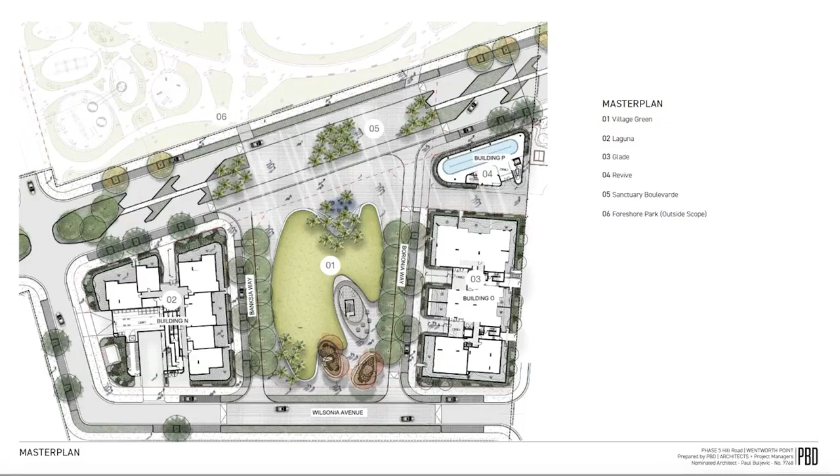Ed touched on Sekisui's core principles, and what we've done in terms of our architectural approach in the conceptual arrangement is incorporate these core principles within a theme inspired by nature, utilising components of nature's organic fluid form and texture within our built form design.

When we're looking at architectural design and putting a built form together, there are really three steps we take. It looks at a primary form, then starts to look at the articulation and the horizontal and vertical treatment of a built form, which brings that articulation together. Then we move into a third tier, which is typically looking at the finer grain detailing.

Looking at those pragmatic ways we've adopted that inspiration, we're taking a master plan envelope and articulating it in a form that expresses that fluidity, that sculptural element.

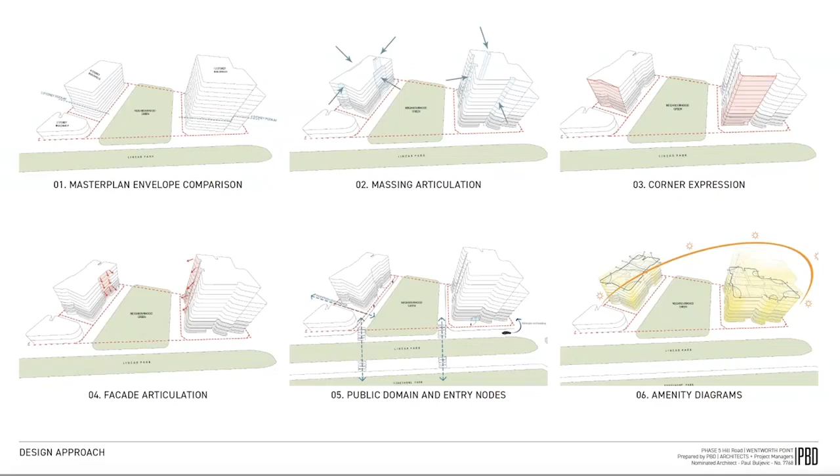They're quite intentful in terms of an indentation here might promote a view or additional aspect towards the north, or natural cross-flow amenity. Those are some of the steps we've taken to derive the built form, and I think they're quite important diagrams to at least understand the basis for how we've approached the architectural built form. You'll see that in these perspectives.

When you're looking at those earlier considerations in terms of built form, you can see how we're applying that fluidity to create that corner expression of Laguna, for instance. We've got a thicker ribboning detail along those podium levels to, again, promote more privacy in a pragmatic way, but also help the form give a sense of grounding and a lightened sense of detail as you approach the upper levels.

And then we talked earlier about how we use that finer grain texture inspired by nature to introduce some of these finer screened elements, the softer touches which provide texture along the facade, but also help identify principal nodes of entry. They identify the corner of the built form and move that expression amongst those three buildings as a cluster of buildings that relate to one another in that sculptural form.

They have their own identity, but they carry through some of the palette, some of the design intent, that fluidity, that organic form. You'll see Laguna is a 13-story building to the top left, and Glade being the 8-story building on the top right.

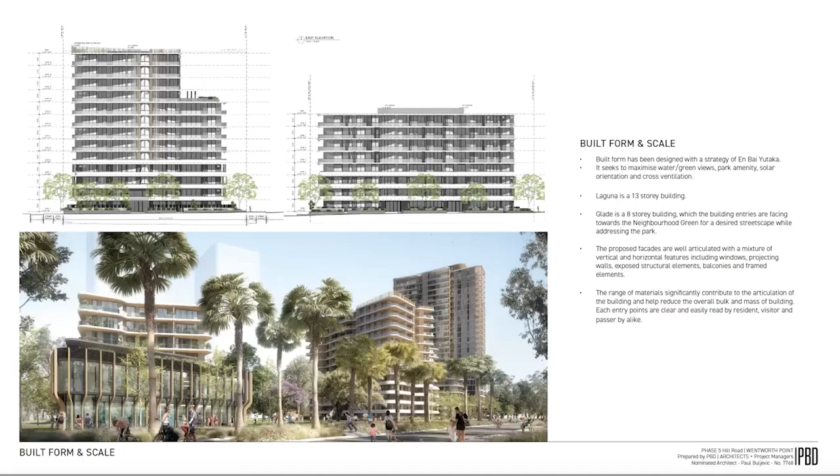So we'll just touch on the village green. It's quite a flexible space, quite passive. It has a perimeter planting type structure to assist in making it a more pacified space. It has a higher ground condition, which helps promote outlook over Sanctuary Boulevard through to the foreshore. As mentioned before, it's informally dedicated towards phase 5, but it is publicly accessible to all residents.

You'll see some annotations there in terms of some of the features accommodated within the village green, including an amphitheatre, water features, some barbecue areas, and again a tree-lined edge, which helps create that framing towards the park, and a good flexible open lawn space, which can be shared and accommodated and used by residents.

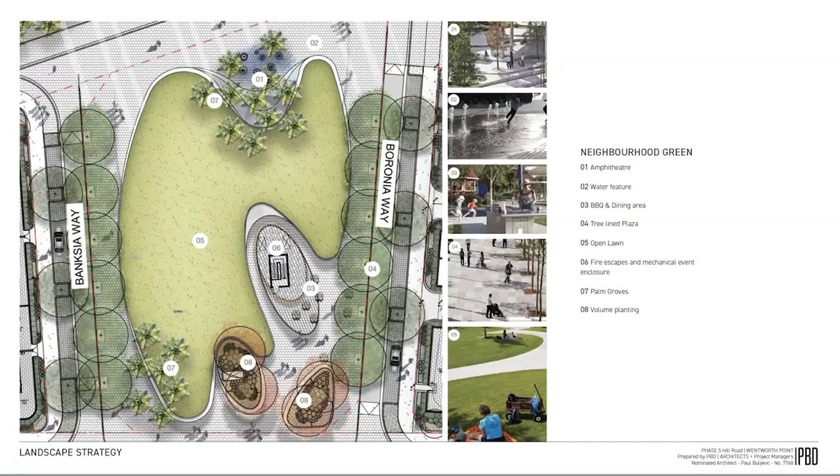And we'll let our landscape architect, Nick, sort of move into more detail of what's been provided in terms of facilities along that village green.

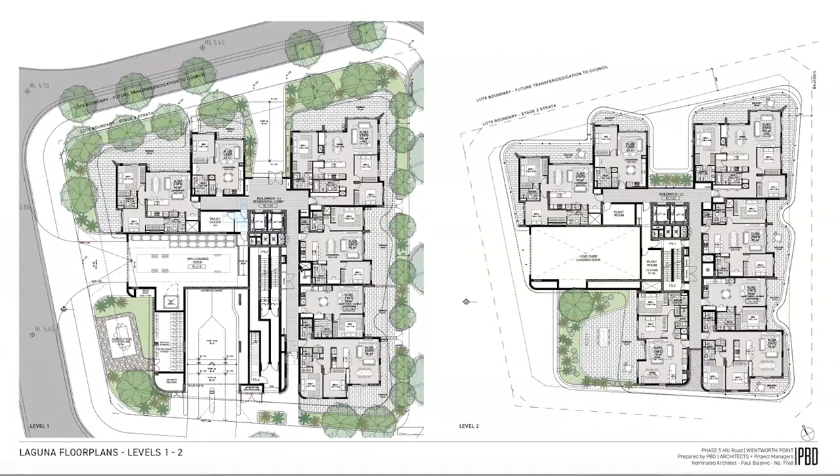I'll probably focus on a typical plan, but just to give you an idea about that ground plane level, so courtyard apartments again flanking the north and the village green towards the east, and keeping the servicing component through towards the south in terms of access to the basement, loading and bicycle parking you'll see along that edge.

But sort of zooming in on a typical plate, you'll notice that this building, or both buildings in fact, this entire phase has no single orientated southern facing apartment. So again, strike on that principle of amenity is maximising the apartments that have outlook towards the river, towards the foreshore park, towards the village green. We're really maximising the number of apartments that have that northern orientation. If they don't have a northern orientation, it's northeast or northwest orientated. And again, this building being 13 stories, having a scissor stair arrangement, a dual lift arrangement, access to natural light and ventilation to the lobby, and then honing in on the apartments themselves.

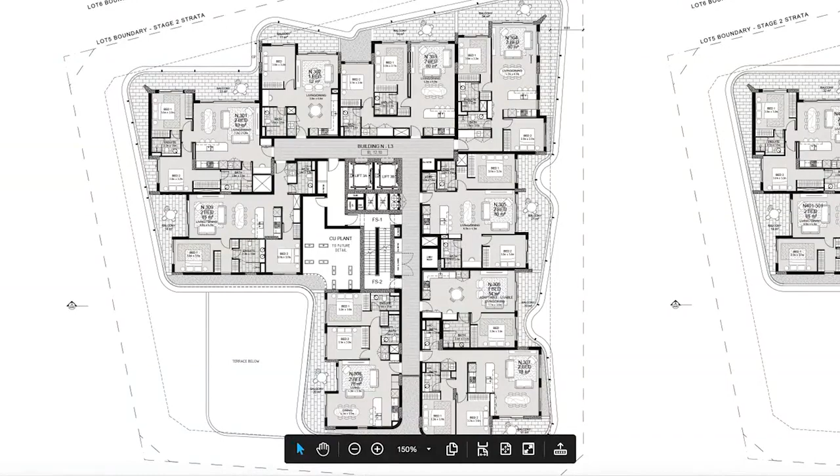Again, balancing the pragmatic with the beautiful, essentially looking at the spatial quality in terms of the interior layouts that maximise the opportunity for furnishability, uninterrupted wall space within the living area such that one can furnish, add artwork, entertainment units, it can be adequately furnished without interrupting the flow of that space, and using size and proportion to maximise furnishability and flow within that apartment. So you get an idea through here.

Again, plenty of storage. The master bedroom will always be of a size and proportion that's larger than the second. It has additional robe, ensuite. This is our kitchen with an island bench. All our 2 and 3 bedroom apartments have an island bench. Again, plenty of storage. Second bathroom, readily accessible from the second bedroom and for guests. And again, storage and a laundry cupboard. That theme in terms of size and proportion is carried through in all apartments.

So again, you'll see a living room here of an equal size and proportion at a minimum of 4 by 6 metre clearance. Kitchen with an island. Some consistencies along the way in terms of wet area detailing and kitchen detailing, which Angus will run through in greater detail. But that consistency allows for repetition, but it also allows for structural alignments, minimising transfers, ensuring ceiling heights are maximised throughout each apartment, and that connection through to the private open space is also maximised.

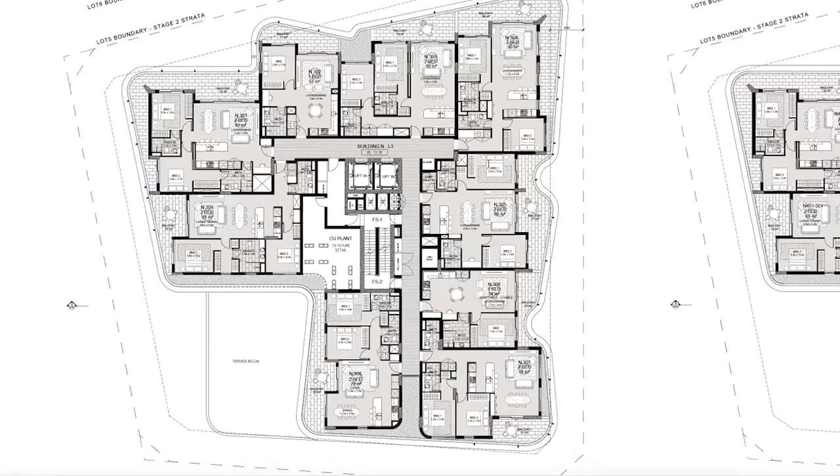This is quite a popular layout where we have bedrooms split on either side, an additional study, bedroom and bathroom doors off that nook, and a walk-in laundry in this instance, always accommodating a size and proportion adequate for that apartment.

Largely typical floor plates, though we do accommodate some larger apartments where we end the podium and express that verticality you saw in the CGI components. Again, wide fronting living room, dual aspect.

The proportions generally increase for a 3-bedroom, so 2 full bathrooms, master with additional robe through here. These apartments are carried through on those floor plates.

Where we have the opportunity, we have not only dual orientated apartments, but dual orientated living spaces, giving those corner living arrangements quite good amenity, outlook and natural light. So aside from not being directly north facing, these apartments will have an abundance of light and ventilation with that dual orientation.

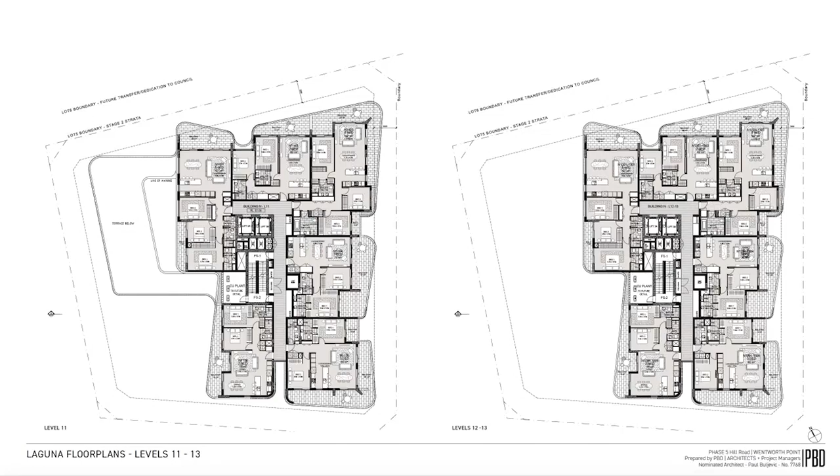As we move up, we have typical apartments in terms of 3 bedrooms, all typical from what's happening below. We start to look at amalgamation on those top 2 levels, where we have a 3-bedroom in both the northeast and northwest orientation, with corner living rooms and that dual orientation.

I'll keep moving through, we'll have some questions at the end. This is essentially looking at Glade, an 8-story building. Given it's 8 stories, there's no requirement for a scissor stair or an additional fire stair.

So we've split the building into two cores, which maximises the amenity and the opportunity for dual aspect apartments. This building far exceeds apartment design standards in terms of access to both solar and naturally ventilated apartments, with all these dual aspect, wide fronting living rooms creating really good amenity.

These are northeast, northwest facing apartments, with that bank of 3 facing north maximising the opportunity to achieve good amenity. All the same principles as you saw in Laguna have been adopted in Glade in terms of room sizes, proportion and clearances.

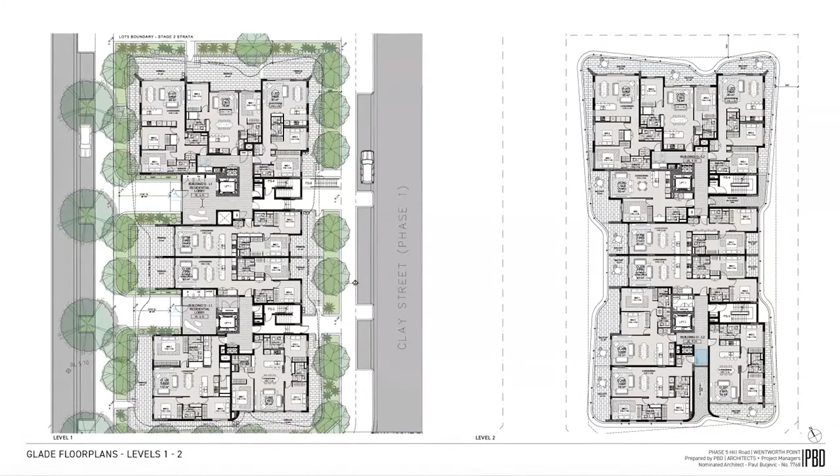And the furnishability, really focusing on that pragmatic sense of how one would reside in these apartments and how they would add their own layer once they move in. You can see the access to that public domain at ground level is off the western edge, adjacent to the village green, with very generous sized lobbies across the spread of both buildings.

Again, typical apartments throughout with natural light and ventilation, and no single orientated south facing apartments throughout the entire complex, which is quite an achievement. Both lobbies have access to natural light and ventilation.

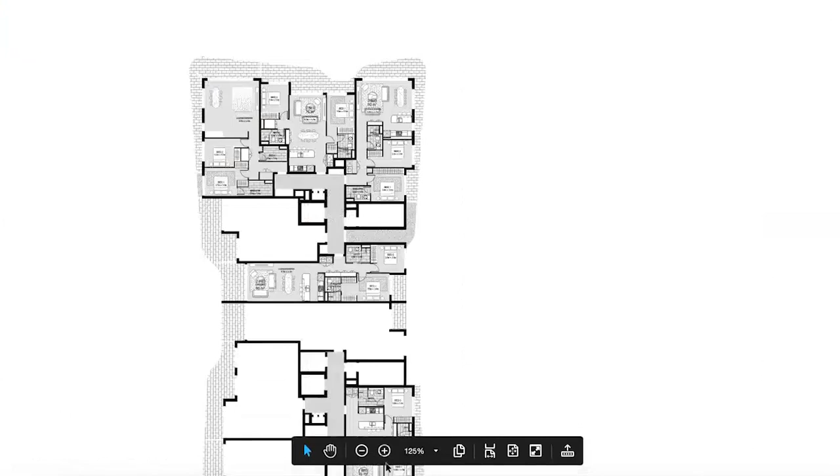I'll just zoom in on a couple of these plans. I know I won't be able to go through every plan, but I think it's important to understand some of these principles.

So again, having a sense of a little relief, almost an L-shaped living space, but maintaining those clearances, oversized kitchens with plenty of storage, additional storage and linen press off corridors, keeping access to these bedrooms off a corridor and not a living space.

Again, master of a good size proportion with a walk-in and an ensuite, the 2nd bathroom readily accessible by guests in that 2nd bedroom. Cupboard laundry through here, but really focusing on maximising storage and amenity within the apartments themselves.

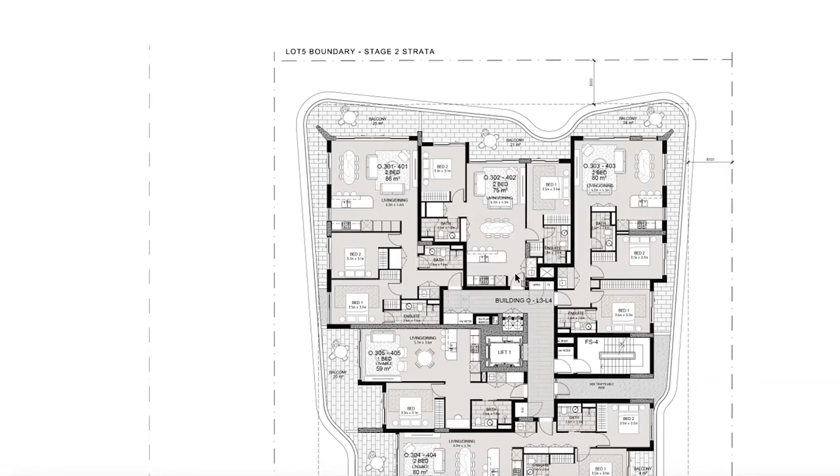You start to get a sense that, albeit these 80 to 86 square metre apartments are quite generous, even a 75 square metre 2-bedroom north facing apartment does not feel undersized, because of maximising the efficiency of how one moves through the space, minimising corridors, and applying as much area to the living space as possible.

You get a sense of how that fluidity and that inspiration of the concept narrative has informed the form, but also promotes better outlook and relief in terms of these dual orientated apartments as well.

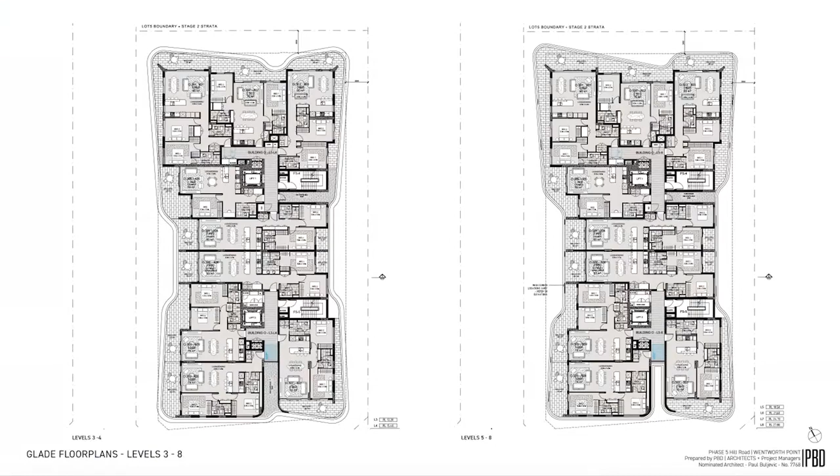This is looking at the Revive building, essentially north of Glade, so between Glade and Laguna. We have our pool facilities at this ground level.

We have a gym facility through here and a rooftop gym component as well, with an opportunity for an active edge along the southern component of Revive, with a cafe proposed along this section, which will help promote activity and engagement along that edge.

Architecturally, or from a design intent perspective, this building has its own identity, but it carries through some of that finer grain materiality and palette and that organic form that has inspired Revive.

What we've done is we've pushed all the facilities in terms of bathroom and change areas down into the basement, which is accessible via this lift and stair, to maximise that opportunity for quite a large swimming pool, and also allows for that opportunity for that cafe edge.

Angus will go through some conceptual images we have of the interiors direction for this scheme, and I'll push ahead with this because I know I'm running over time.

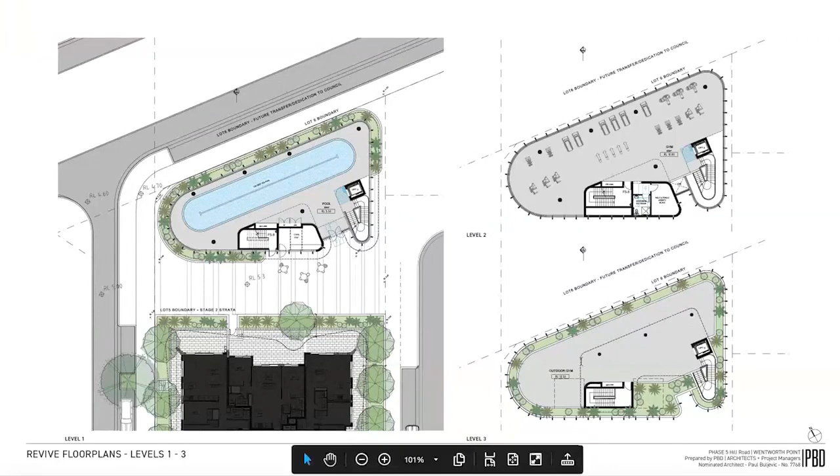The gym on level 2, again, quite an open floor plate. This is not a gym that's sort of a leftover space as part of a development of this scale. This is a fully purpose gym that can accommodate quite a bit of equipment, as well as a rooftop covered area through here facing north, which will be quite an enjoyable space to be in, actually.

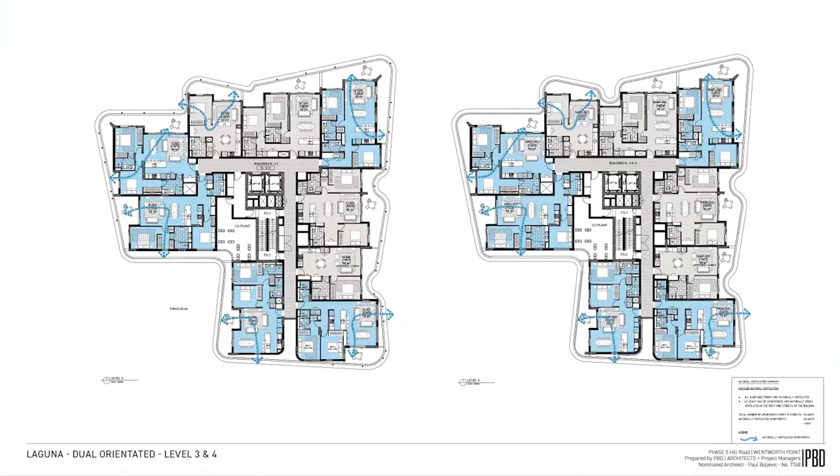So every apartment essentially has a certain quality. It has an outlook towards the village green. It has an outlook towards the foreshore park, the river, and northern orientation, really maximising that opportunity to create good amenity for every single dwelling.

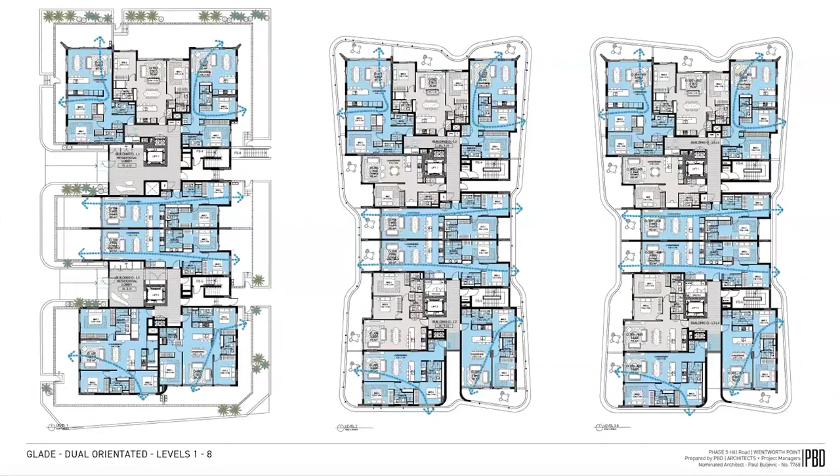Some sun-eye views. These are essentially just showing throughout the course of the day the extent of solar access on both buildings and of course that village green.

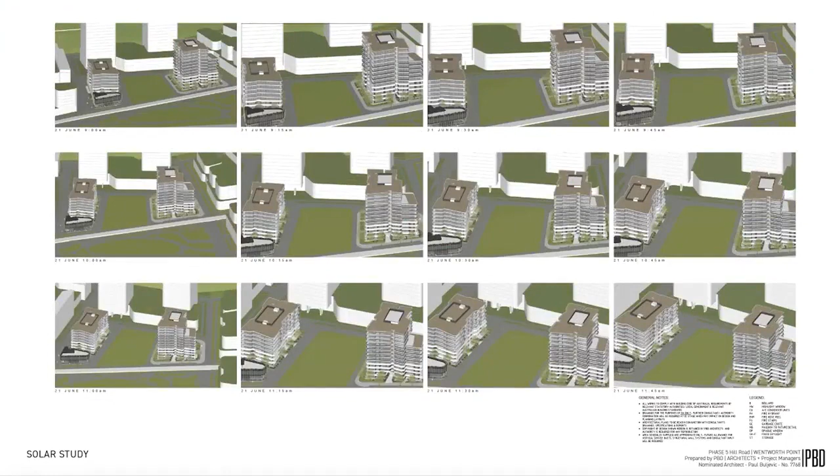As a summary, across both buildings, we're quite heavy loaded on the 2-bedroom apartments at circa 78%, 15% 1-bedroom apartments, and circa 6% of the 3-bedroom arrangements. So that's 26 ones, 134 2-bedroom, and 11 3-bedroom, totaling 171 apartments.

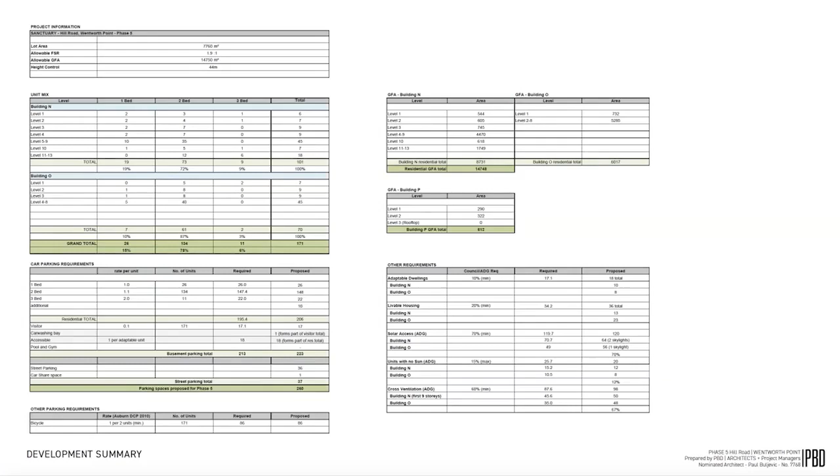As discussed, that basement car parking is quite generous in terms of its car parking allocation, and Ed might go into further detail about the allocations, but essentially all 3 bedrooms have 2 car spaces. The 1-bedrooms have a car space, and some of the 2 bedrooms will have 1 or 2 bays. And that's sort of it in summary.

This is sort of a product placement mix for each built form. So this is looking at Laguna and an apartment mix, as well as Glade across that spread we discussed.

I'll just finish on that image, which is encapsulating both Glade and Laguna in this image. So to give a sense of that quality, you can see those splayed edges along those podium levels of Glade sort of mimic what's happening in Laguna, but at a different scale, tying in as a cluster of buildings that theme of both Sekisui's principles as well as PBD's in terms of how we look to balance the pragmatic and what we see as being quality architecture.

Definitely. Thanks, Paul. That's a great presentation.

In terms of just quickly touching upon parking, the regular parking will launch sales of apartments without allocating the individual spots, and we'll do that at the end when we deliver the building. As Paul discussed, 10% of 2s will have, and it will be the premium 2s, shown on the price list which 2s get the actual second car spot. So the premium 2s will get a second car spot. The 1s will have 1 car space, and obviously the 3s will have 2 car spaces.

There's also the amalgamated apartments. So if any of your purchasers want a 4 or 5-bedroom apartment, we do have the amalgamated apartments that Danny or Paul can speak about, and we're planning to present that at the next webinar, where we can show you how 2 apartments can join to become 1 apartment to create a larger apartment if required.

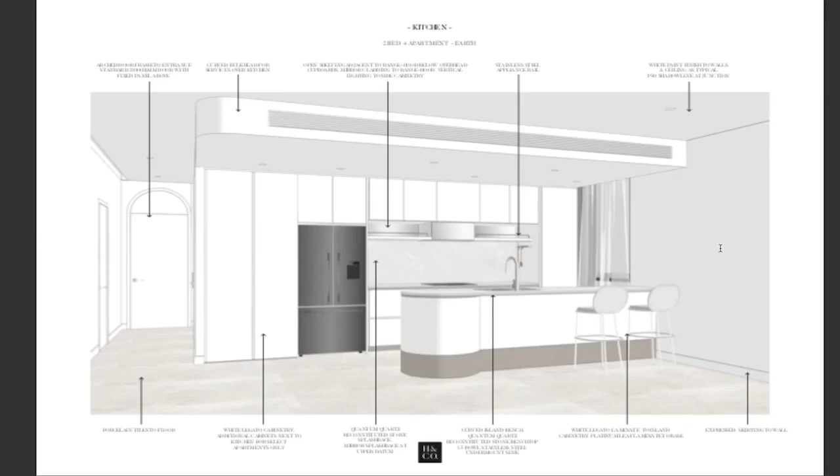For us, we're always trying to create material schemes that don't feel like generic multi-residential finishes. We very much want them to feel like a private residential level of finish. That's something to bear in mind, and you'll very much see that when you interact with the materials in person. As mentioned, these are not marketing CGIs, these are sketch form 3Ds that we use to translate our design thinking to the client and the team.

But I wanted to take you through some of these images today. One of the first things you'll notice, building upon that relationship to the architecture, is a lot of curve form brought into the interiors. The first is the apartment entry door that you pass through. Then we've done small gestures like curving the edges of bulkheads and softening, really trying to move away from right angles where we can, to soften and build upon that notion of flow, as Paul has talked about, moving in and around the home itself.

You'll see that material form taken through to the island benchtop, which has a breakfast bar functionality that you can sit at, which is really important to us. This white material shown through here is called a legato finish. Unrendered, it's very hard to appreciate what it is, but to the touch it's incredibly soft, and it almost has a fabric type softness to it. So again, tactility is really important.

We've got stone splashbacks and bench tops, and custom hanging rails, hanging shelves rather, sitting above the cooktop area with a mirrored built-in range hood. These are display shelves for spices, glassware, crockery, or whatever you may like. Fisher & Paykel are supplying all of the appliances, and there'll be, I believe, a subsequent webinar with Fisher & Paykel that'll tell you about all the great developments they've been making and why they've been adopted on this project.

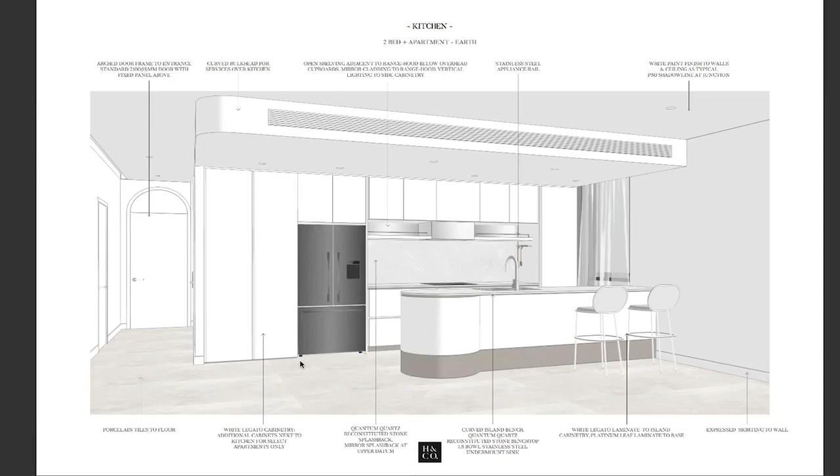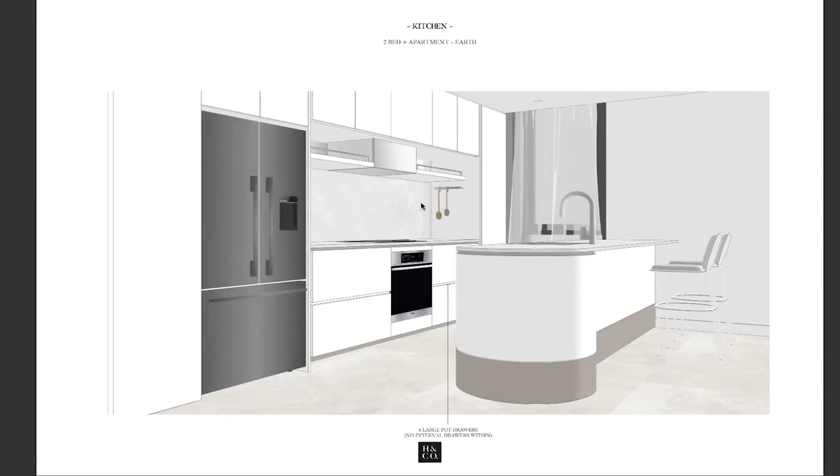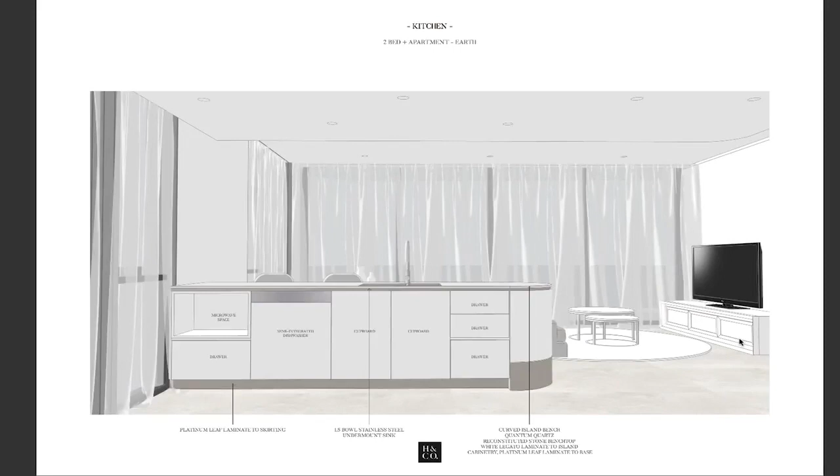If we move through these images, we've also made colour changes to the internal carcasses, playing with really soft tone-on-tone textures and colours. We've also added hanging rails here for cooking utensils, little touch points that add a point of difference. Storage within kitchens is always really important, as you'd appreciate. In here, we've opted for large drawers to the rear of the kitchen, really trying to maximise the internal space of storage to maximise usage for the purchaser. And then there's a view back, looking over the island, into the living room itself.

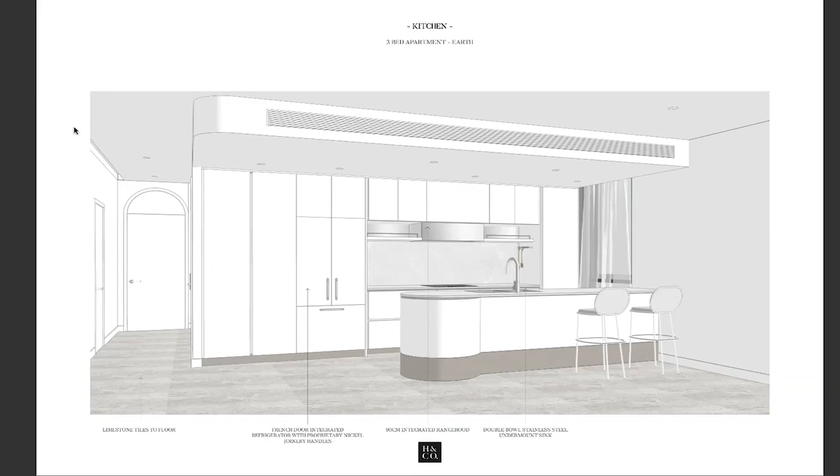One thing I neglected to mention is lighting throughout. All premium LED lighting, but we've also put pelmet lighting in many of the rooms, the first of which in this instance is down the corridor into the main living area. So you have this beautiful wall washing, grazing effect to the living space, leading you into the space. We have beautiful door hardware selected the whole way through, again showing the premium nature and tactile nature of some of the finishes we're bringing in. This is showing the elevation, just to give you an idea of how it all comes together with the curve forms, floor finishes, skirting, lighting, bulkhead treatments, etc.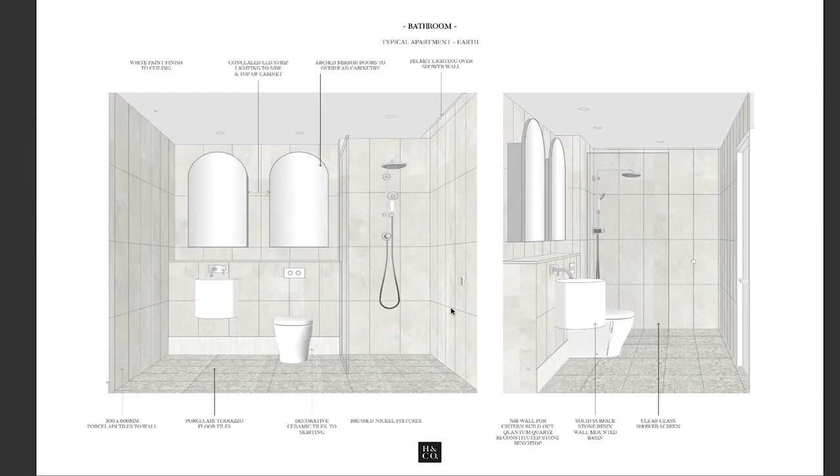They've got full storage behind them with power points within as well, so you can plug in any electronic devices you need. We've got that porcelain terrazzo floor the whole way through, this beautiful decorative handmade tile, and then full wall tiles around. We also have this beauty ledge that sits the whole way across the rear of this section of the bathroom, and pelmet lighting washing down that shower zone, really calming and relaxing spaces. When we look at the typical bedrooms, we've got full loop pile carpet throughout.

We've got pelmet lighting and window head dressing steps through here, so the head of the curtain disappears, which is just a discrete detail through there.

Moving on to what we were talking about earlier with form, we're actually rolling the edges of these plasterboard walls as you come into the robe - these little soft touches build upon that language of form.

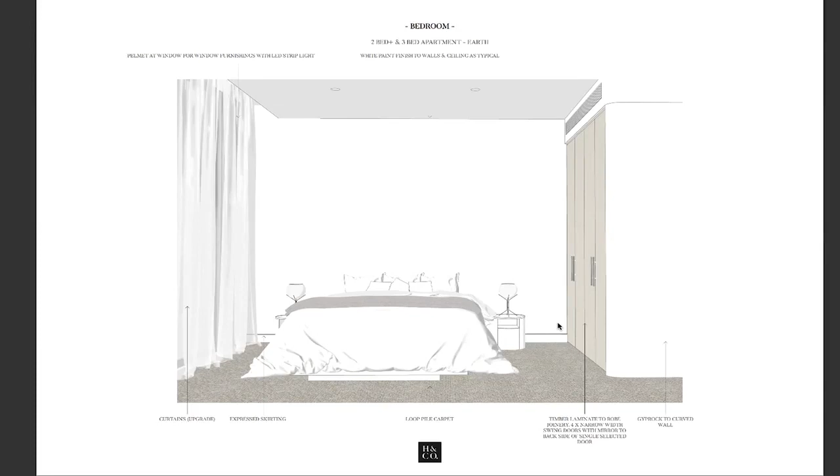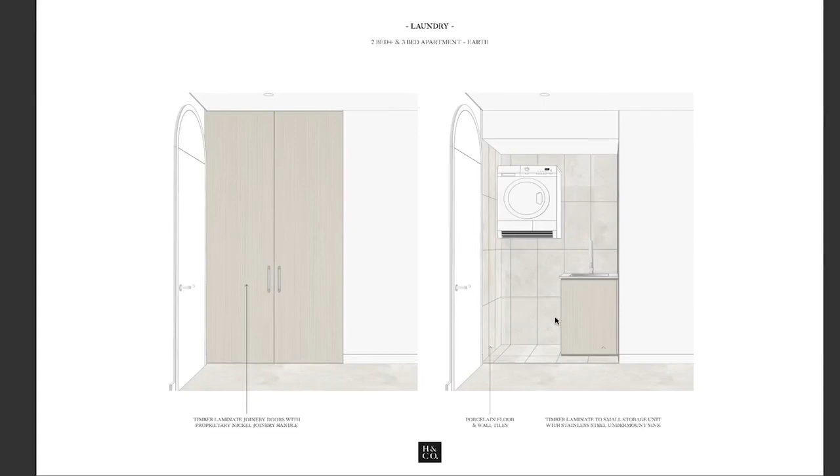Full timber laminate cupboard doors to the robes with decorative handles to open them. The laundries are really well proportioned, with the sink in the corner and supplied with a dryer, plus adequate space for your washing machine, fully tiled throughout.

If we look at the water scheme, you'll see that the finishes scheme is cooler - this is the more contemporary and youthful scheme out of the two.

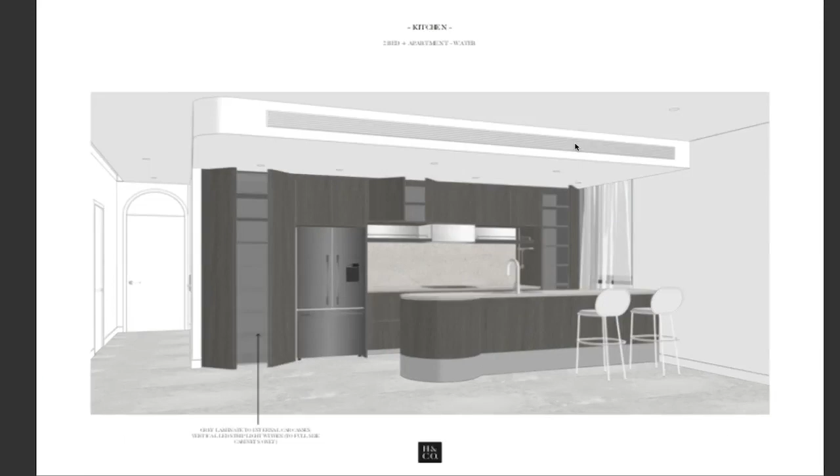If we move through and look at how that translates into the apartments, you can see that's quite a lot darker, and I think this is going to really motivate the more contemporary and youthful buyer as well.

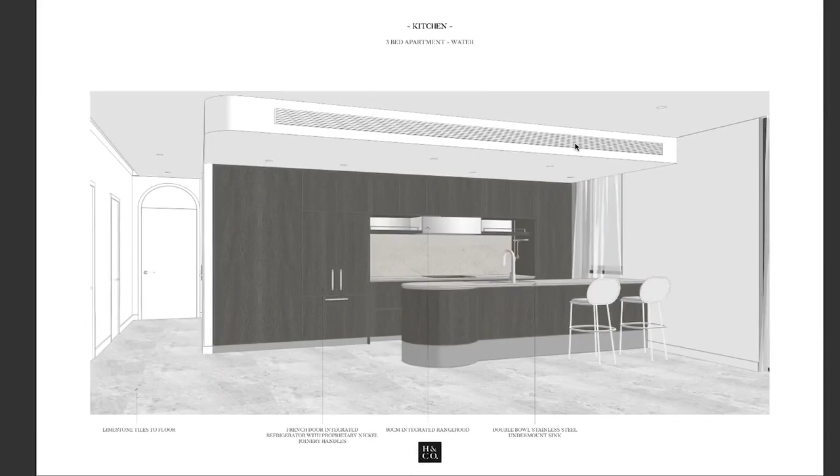When we look at 3-beds, the main change is the French door integrated refrigeration, and then the natural stone floors, which is a really premium touch to those 3-bedders.

We're bringing an integration from internal to external with the coloration of that material, so that the eye really runs as it carries through externally.

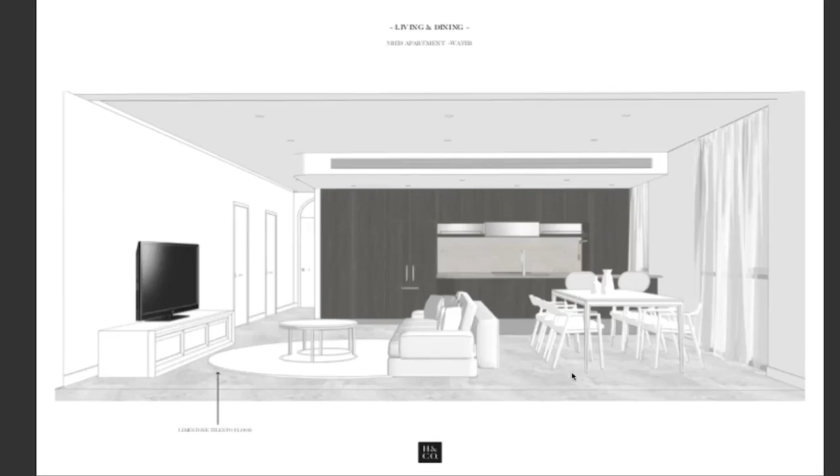One offer we're having here is that for the 3-bed purchasers, we're discussing with Sekisui now having a level of customization - private design consultation with us to add that kind of private residential touch to it. That's something we're discussing now, which we believe will appeal to those 3-bed purchasers.

I'm now just going to move on to the Revive building and briefly talk about what we're looking at for Revive.

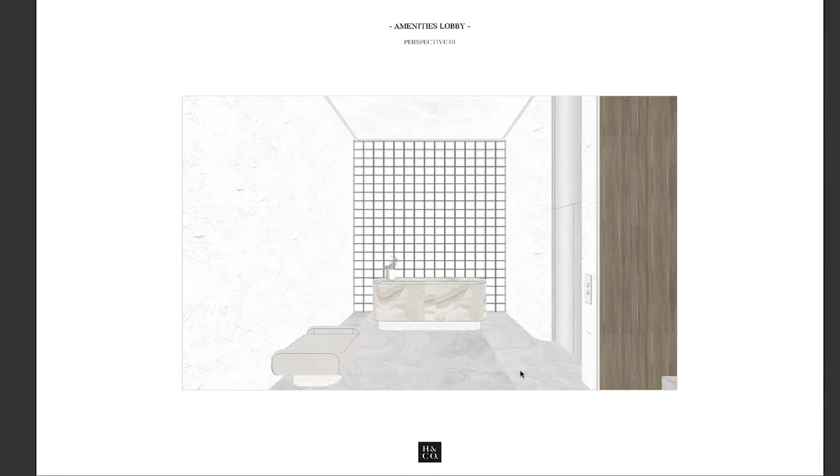We're using a rough white coat render the whole way through, so very textural, and that would all be grazed with pelmet lighting throughout.

A lift takes you up to the gym and the rooftop gym component, and then a beautiful stair that's shrouded in timber, linking in with what's happening on the external characterization of the building.

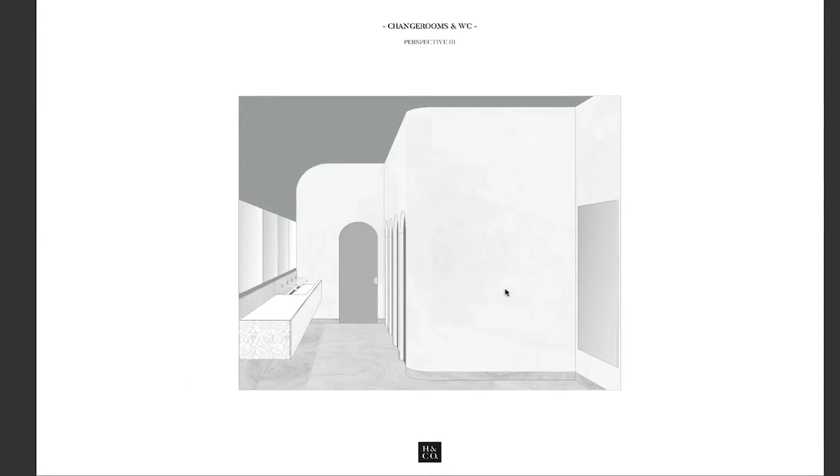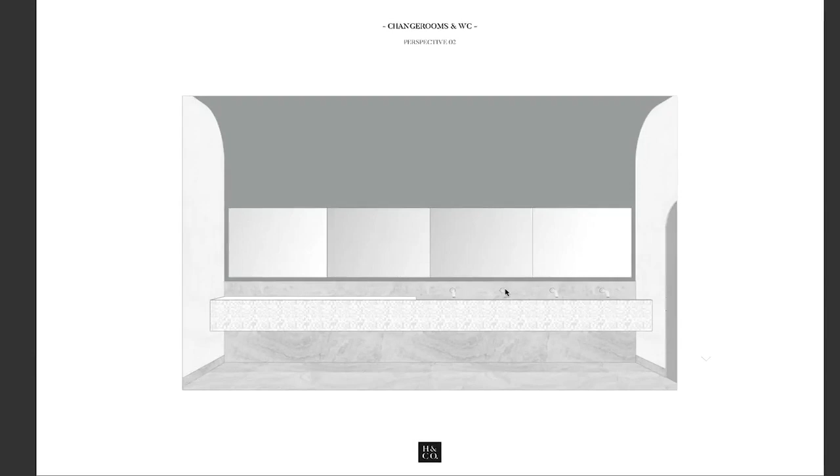You can see that those curved forms have followed through from the architecture and made their way into the interiors. That fluidity of form was something really important to bring into the interiors themselves.

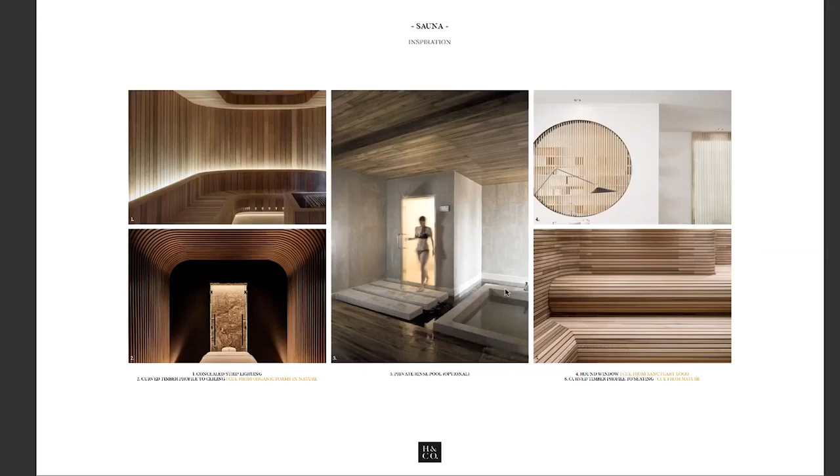There will be sauna, steam and spa function within. Here's a look at the steam, very white and ethereal in nature, where the sauna is much darker and warmer and full of timber - that contrast between the two.

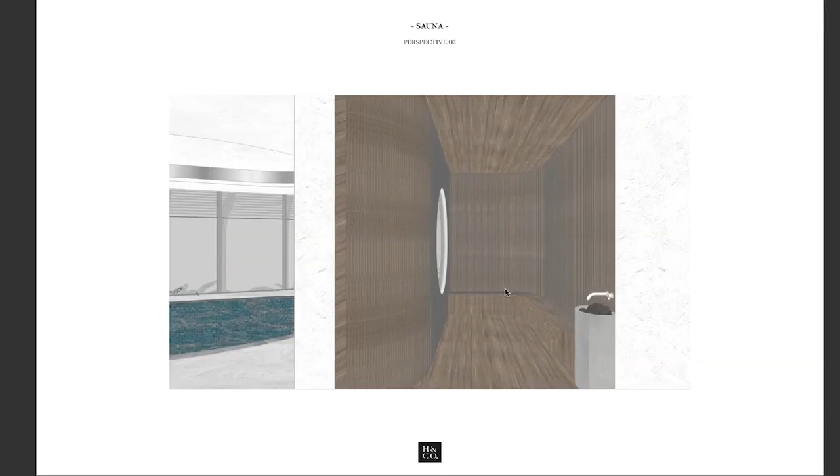Here's a view looking into what the sauna may look like, with that view connection into the main pool.

The indoor pool area itself is very white and light in nature, maximising all of that beautiful glass we've got sitting around and the landscape that kind of hugs the edge of that building.

Here's a view looking down the length of the pool with that rough white coat render the whole way through the walls, with a polished plaster over the ceiling.

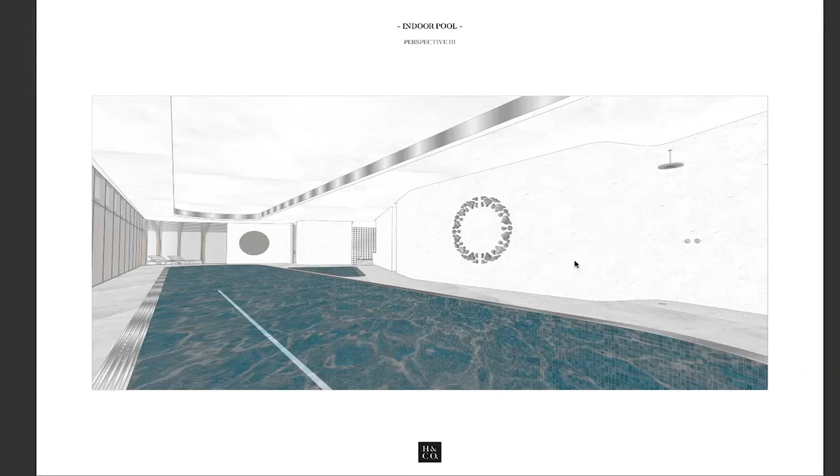And then these apertures that you can see through from the sauna and spa. There'll be an element of brand integration through here as well with the logos of the Sanctuary brand - so there's a few 3Ds looking there.

The gym, as Paul touched on before, is very much a serious gym. It's gone well beyond what would typically be offered by most developers from a gym offering.

Here's a look and feel for the material palette through here, and Technogym, the supplier of the gym equipment, have put together some preliminary layouts. This gives you an idea from a scale perspective of how much equipment will be there, and the diversity of equipment from strength training down this end through to cardio training around the edges, with functional training sitting through the middle. So it really caters very well to both novices and advanced users of the gym.

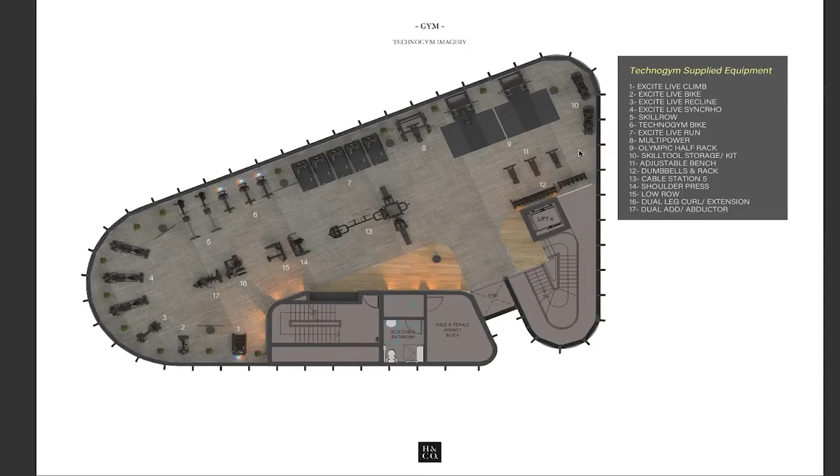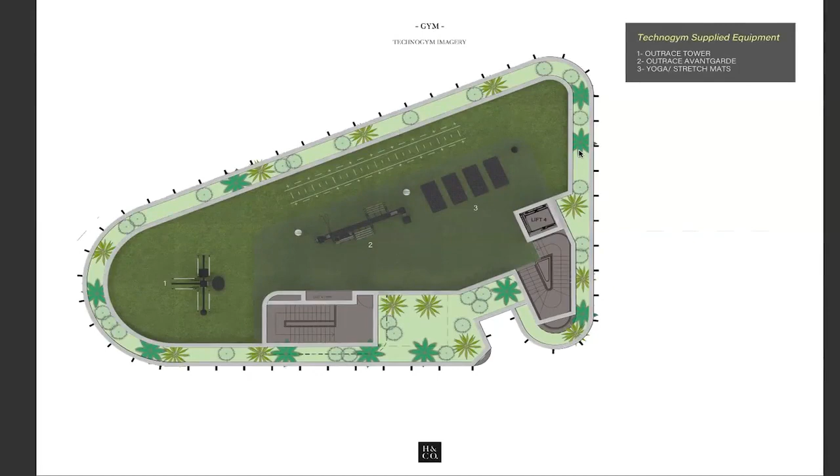Some basic 3Ds here of what that equipment layout looks like. As I mentioned, we're working through the interiors, so the interior strategies haven't been applied to these 3Ds as yet. And topping out this building is a really beautiful outdoor gym area, which has functional training on the rooftop itself.

Okay, I'll back to you, Ed.

Thanks, mate. Great presentation. A couple of things I might add. These are just working drawings, so they're not CGIs. They're basically trying to provide our partners an insight on the things that we're working through at the moment. They'll probably take another 4 weeks to have the proper CGIs developed and made for presentation to your customers.

The other thing I wanted to touch on is the kitchens and the balconies. There's a couple of things that we've done differently on this building than our previous building. All the range hoods are ducted, so they're not recirculating, they're actually ducted to the outside. And all the condensers for the air conditioning are not on the balconies. We felt it important not to encumber the balconies with condensers because of the outlook. So there's no condensers on balconies, and range hoods are ducted.

Nick, I'm going to hand over to you, buddy, to talk through some of the landscaping and some of the placemaking principles in that neighbourhood green. I heard that's it, okay. That's okay, I'm just trying to fill the gap there with a bit of... I'm sure you did a good job. All right, mate, I'll hand it over to you, Nick.

Metcalf, I'm a landscape architect from Site Image. We've been fortunate enough to be involved in numerous developments with Sekisui. The good thing about working with Sekisui as a landscape architect, as Edward touched on, is their commitment to landscape and the environment, so it's always a pleasure.

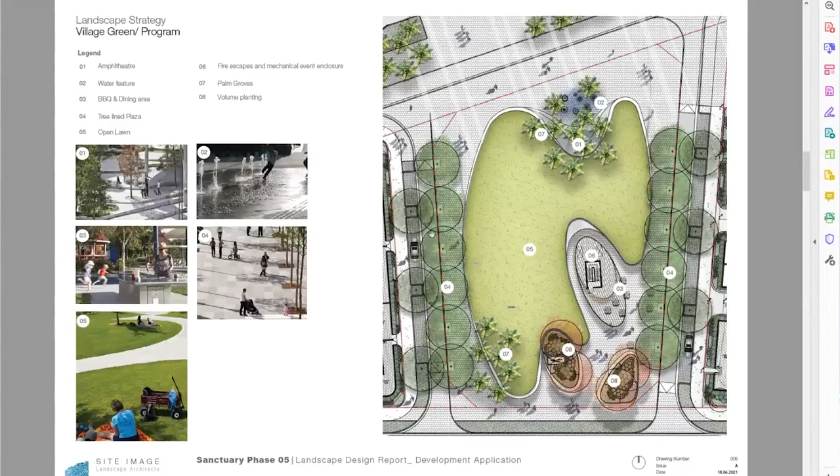A small toilet facility as well, so you could spend the afternoon out here without having to go back to your apartment. And the rest of the space we see for meeting, picnics, maybe even small organised events for the sanctuary community.

A few more bits of precedent imagery, beautiful modern architecture for these facility buildings, which will probably tie in to the two buildings adjacent. Large native palm plantings will allow view sheds right across to the water itself. High quality materials — it's going to be a very special, simple space, beautiful to look down on even if you aren't engaging with it on the ground plane.

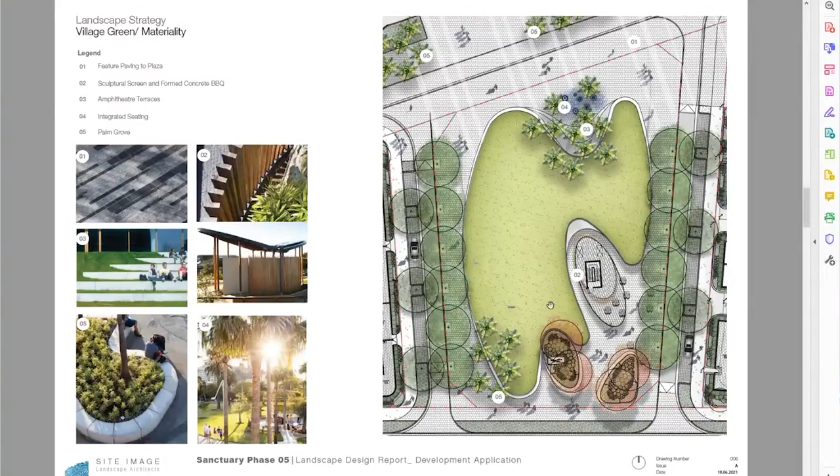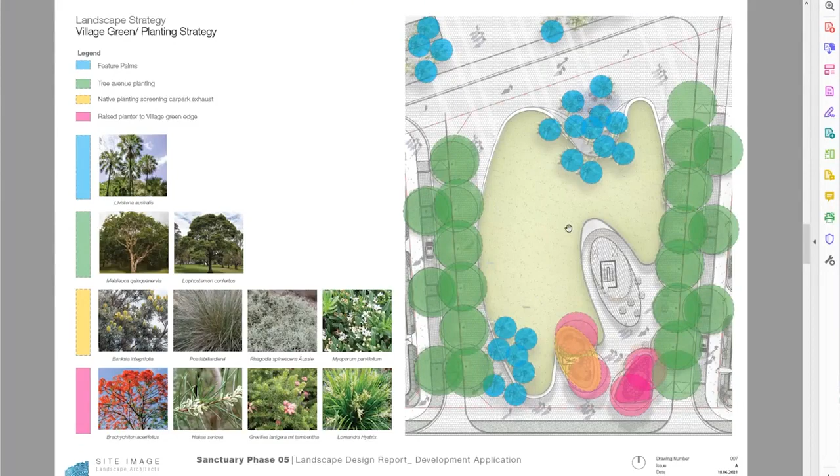Some of our greening material for anyone interested in plant material. Going back to Satoyama and Michi and the principles of Sekisui, it's very important that we're adding to the ecology of the area and creating a better environment, which ties back to wellness and concepts of biophilia — being surrounded by nature and trying to get some fauna back into the site from what was originally there.

This is the northern end, showing the connectivity to that really special foreshore park, which will be delivered later on in the development, and showing that strong connection where traffic will be peeled back and pedestrians will be given the priority.

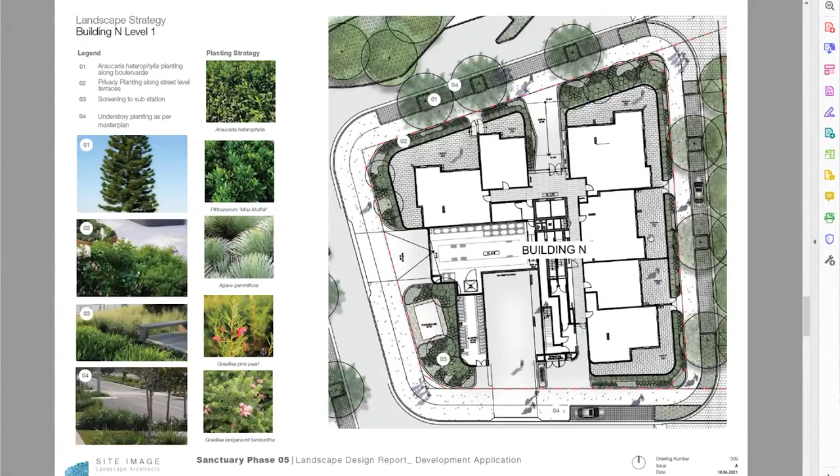The Laguna building itself, much like the Glade, will be ensconced in landscape on the ground plane particularly. This is the ground floor plane, providing that really important privacy aspect for those ground floor terraces. Again, bringing back to those principles, bringing nature as close to the building as possible, concentrating on native plants, maybe a few exotics, trying to give the place a sense of place and bringing some of that bushland type species right up to the development.

A bit similar in some of these breakout spaces. We've got plenty of landscape surrounding them, which will create really good buffers from wind and privacy from other developments as well.

We really made sure that the landscape areas are simplified but give the best outcomes possible. We believe you don't have to be over the top or too avant-garde with your landscape — providing good soil volumes and simple areas for trees, shrubs and ground covers gets a really good outcome.

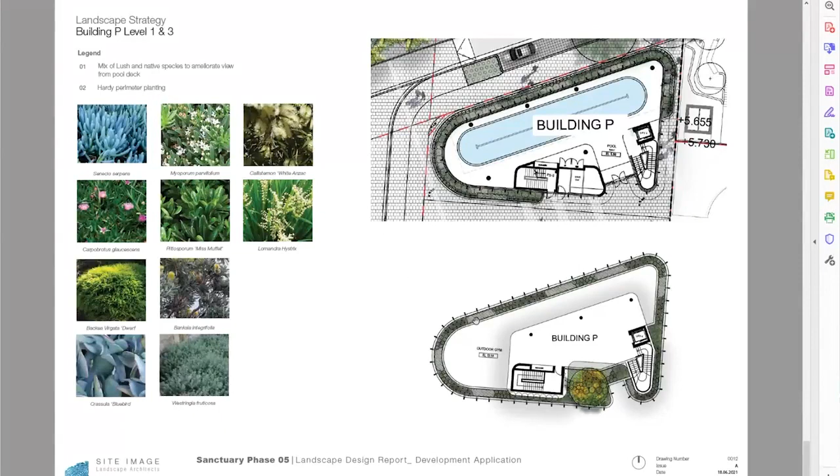Again, around the Revive building as well, bringing some greenery around the edges there, promoting well-being, at one with nature, etc. And that's the end of my presentation.

Just going back to the master plan itself to recap. Thanks, Nick. Just two things, if you can. Can you comment on level changes? I think a few people have discussed potential views, view lines, and tree selections and things like that. If you can comment on that, please.

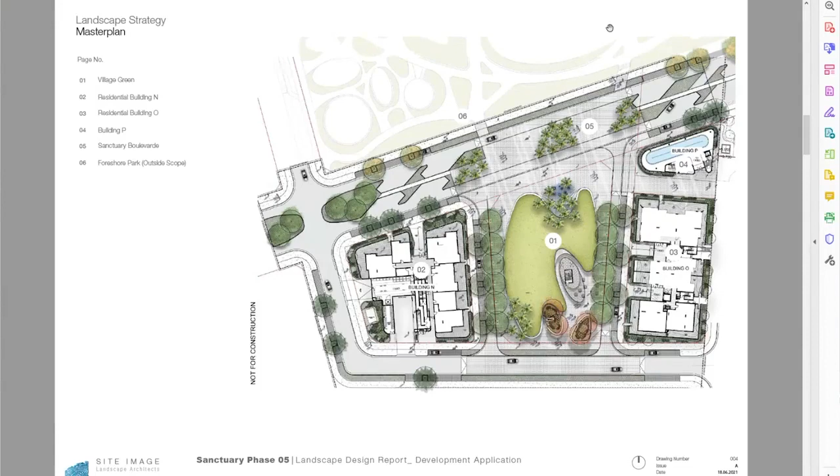The village green itself will be raised around 1 metre, and then we provide this amphitheatre area to bring that level down. Down to the foreshore park, it's around 3 metres lower as well, so there will be steps to transition down to that space. So very much this would be a vantage point. And with that, you can see the clumps of trees strategically located to allow for those great views across the foreshore park into the foreshore itself and into the river.

Thanks, mate. And there was one question in relation to the space and the neighbourhood size of the village green. I know it's probably, I don't know, 50 metres guessing, but do you have a dimension? About 60 metres by about 20-25 across. Okay, so it's a good village size, a 60, 70 metres separation. Correct.